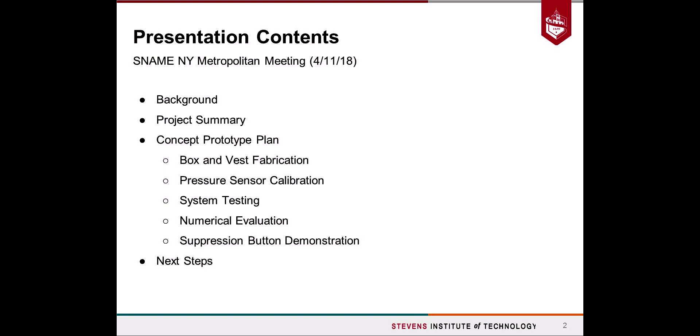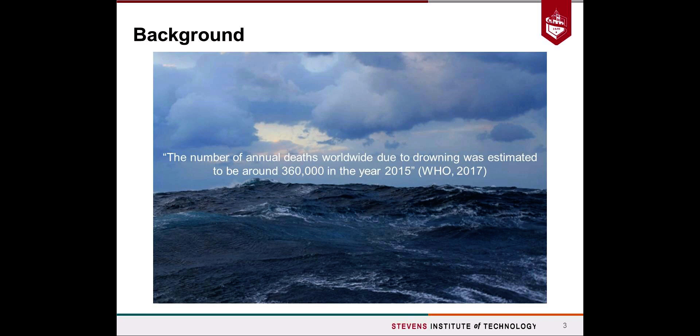So I have to apologize because we aren't actually trying to sell you this currently, but we're going to give you sort of a tasty version. So I'll start with a quote to introduce the problem. The number of annual deaths worldwide due to drowning was estimated to be around 360,000 in the year 2015. This is a quote from the World Health Organization. Of these deaths, nearly 50% are boating related.

So for boating accidents that resulted in the death of victims, 78% of the victims drowned, and 84% of those who died were not wearing life jackets. So let's talk about why people don't wear life jackets. The major quote, and what I hear as a sailor wearing a life jacket myself, is there's a lot of discomfort and inconvenience from wearing a life jacket, which is a terrible thing, especially when we're facing death as a consequence of potentially not wearing a life jacket.

So we look at today's life jackets. Are they the final answer? That's the question our team posed. We think not. There are a number of issues with the current designs, citing unwanted inflation, because the current automatic inflation type life jacket inflates with contact to water. It's a chemical pill that activates and allows inflation at that time. This can happen with a really heavy splash.

It can happen if you need to reach into the water and accidentally dip part of your body that has a sensor on it into the water. And you can become trapped under hulls if you're using small boats. If you've ever been canoeing, you can often get trapped under that, and the life jacket inflates and keeps you under there. And in order to self-rescue, people have to deflate or take their life jacket off to get out from under the hull, and then obviously that's not helping you, and actually hindering you.

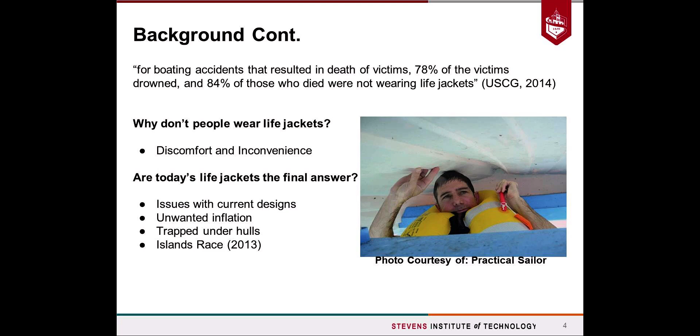And then there's this Islands Race incident in 2013. The Islands Race is a sailboat race off the coast of San Francisco. There was a crew, 5 people or 6. 5 entered the water in the incident. 4 cited their life jacket as rising up over their head, and the compartment shifted to one side, and somebody died in this incident. The body was found with this misplacement of the compartment. So we said, okay, maybe we should try and fix this, essentially.

And we looked at the current market options. There are many things. There's the inherent type, the inherent buoyancy, the big orange thing that you find on the old boats, and the newer types that are manual inflation and automatic inflation. We looked at these because they're essentially the most comfortable and least inconvenient to wear, as they're out of the way, as a sort of baseline product. This is an example of one here, the Mustang inflatable PFD.

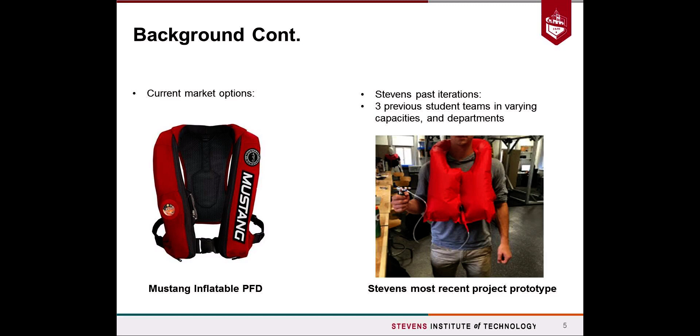So Stevens had tried this project out a few times. They'd done some iterations investigating different parts of the solution, and there were 3 previous student teams from different departments at our school. This is a picture of one of the vests that they created as a prototype. So we took this as a starting point and took their research and analyzed it for how we could do better and benefit from it.

Yeah, still me. We've done this a lot of times, so forgive me.

So our project goal is essentially our statement: use modern technology to design and test a new vision of a personal flotation device. Right, we're engineers, we have tech backgrounds, we want to use what we know to solve this problem.

The first major steps were a full literature review, both of the past Stevens work and of Coast Guard regulations, IMO regulations, the LSA life-saving appliance regulations on how the life jacket should be created. And then we came up with a system concept of what our life jacket would be. Like, if we could imagine a perfect life jacket, what would it be, and how are certain things being combated?

So the electrical part of our team developed the idea to implement a microcontroller and the corresponding circuit to read sensors, which we can elaborate further for you a little bit, but essentially we monitor the pressure of the water to tell the depth in the water column, and we monitor the user's orientation, something we're using in our testing preliminarily and potentially implementing in the final design.

The mechanical piece of our team developed a pneumatic system to handle the CO2 canisters and the CO2 passages for inflation of the compartments. Again, we can answer questions at the end, but we don't really further go into this because this wasn't our piece of the project.

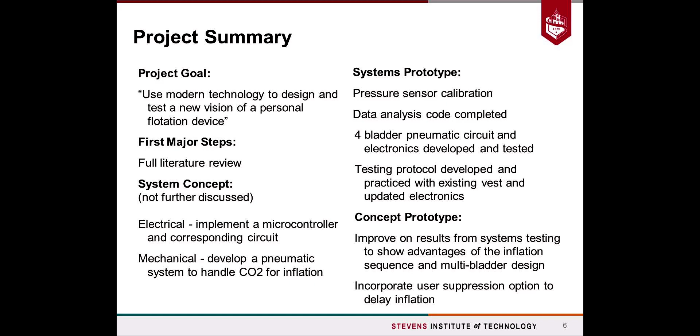And we want to be able to let the user say, look, I've jumped in the water to save my child. I don't want this to blow up in my face. I'd like to be able to swim down a little bit more. So we're trying to work on how that's going to be implemented, but details are still to be developed with that.

All right, so again, to go over a little bit of what we're going to talk about in the next few slides. First, we're going to talk about our concept vest and that prototype, including the box, which is waterproof to house the electronics, and then move on to our pressure sensor calibration. As I said, we've got a pressure sensor on board to measure depth for testing purposes,

and then talk about some of our additional physical testing, the tests that we've done with our previous vests with 2 compartments, 2 air bladders on board, and then talk about a little bit of our numerical evaluation, what we've done and what we hope to do with it, and then talk about our electrical circuit and show the suppression button switch. We've tested an electrical board, and we've also tested this switch functionality, and we'll show you a video of that a little bit down the line.

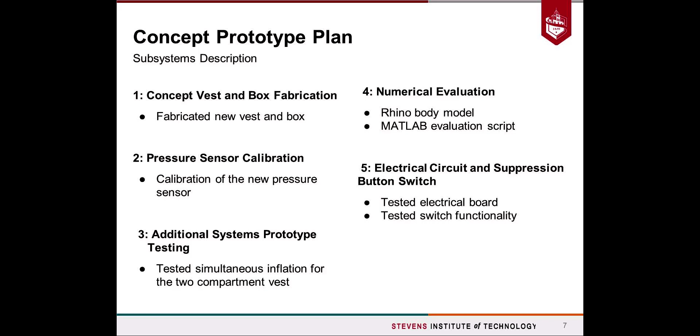So as far as the fabrication of the vest and the electronics box, what you see there on the left is our latest vest prototype. It's a 4-bladder design. The 1 bladder that you can't see is behind the neck to support the head in the floating state. Each of these bladders folds out. They're Velcroed down right now to give it a compact and more comfortable design. So they, when inflated, will reach their full size and right the user.

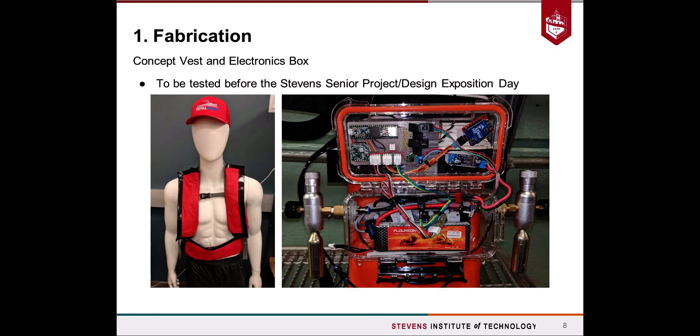And next to that, you can see our fully opened electronics box. It's a waterproof housing that allows for all the CO2 connections, this giant battery that we're using for testing, our valves, and then the different circuitry up in the top half of the box. This is our current state of the electronics box, and obviously we'd like to reduce that size quite a bit, but this is what's really necessary for testing over and over again. And then in a future design, we'd like to shrink this down and make the circuit and the batteries and everything like that more compact.

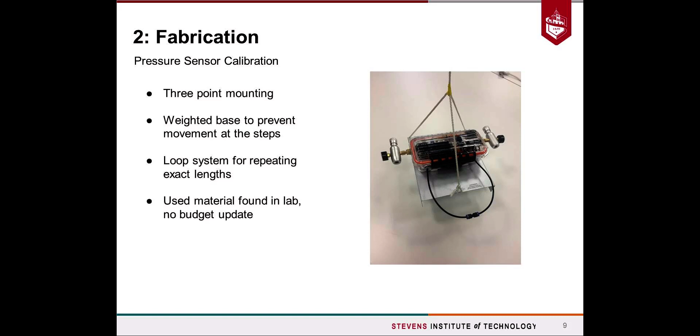It was lowered into the water to 4 different depths, brought back up, and then lowered again repeatedly to show that we were getting the same values no matter how many times it was lifted up and down. And then we were using material that we had in our lab to test this.

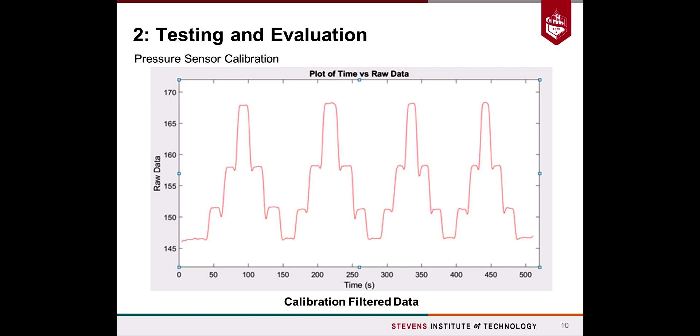So what you see here is our filtered data. So obviously as the depth increases, the voltage also increases. So you see it getting deeper into the tank, raised back up, deeper into the tank, so that we do have that repeatability. So each of those flat horizontal parts are where we were holding it to ensure that we were getting the same reading over a steady state.

From that calibration, we could fit the voltage against the depth so that we could ensure that we had a proper trend. We expected it to be linear, and it was.

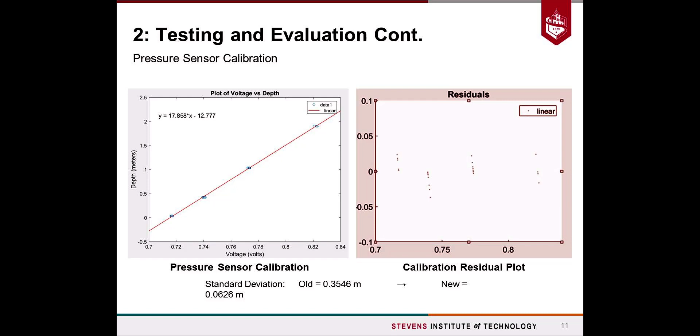So as compared to a previous pressure sensor which we were using, we had a standard deviation on that one of 0.35 meters, so quite a bit of variation, which led to some wonky data in our tests. And the new sensor we've got calibrated so that it's within 0.06 meters, so really a lot more accurate with our depth sensing.

Okay, maybe we don't have a video for you. It could be that this is the PDF and not the PowerPoint.

Regardless, so we did some initial testing on a previous vest configuration. This was a front compartment and a back compartment linked together but separated so that they could be inflated at varying times. And this awesome looking orange thing is our test mannequin. It's something repurposed for lifeguard training. It's weighted to the weight of a human when filled with water, density of a human.

So we used this and ballasted it so that it would sink to the bottom of our tank in a face-down orientation, and we could use the pressure sensor to initialize the vest inflation, and we could test the rotation of the body as it came to the surface and the time it took to rotate and come to the surface. So what we did here was some repeatability testing.

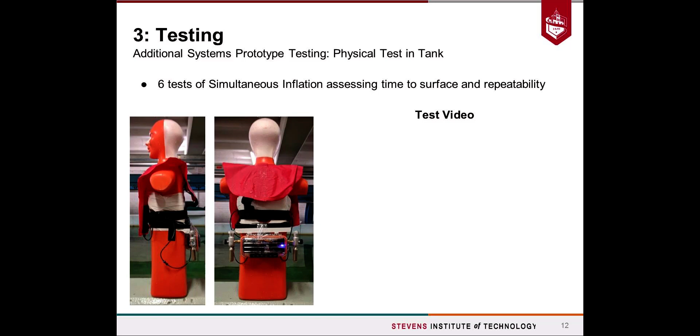We only tested simultaneous inflation. We have done some testing with a delta T introduced between the inflation of the 2 compartments. That data was somewhat inaccurate, so we're redoing this testing, but we have some of this data to present to you here. So what you can see is some data collected from our microcontroller and data collecting unit, and then post-processed.

I'm sorry about some of the text here. Again, I think it's a PDF instead of a PowerPoint.

But on the left, you have body depth and orientation versus time. So the black line in the left graph is the user depth. This is overlaid by an image of a rectangle which represents the body with the 3 axes coming out of it. So you can see the red is face forward off the body, the blue is upward, and the green is arbitrarily to the left of the body.

So this body rotates face down, red pointing down at the bottom of the tank. The black dotted line is the threshold for inflation depth. So it reaches that point, there's a delta T between it reaching that point and the inflation. The blue dotted vertical line is the instance of inflation or activation of the bladders, and they take a moment to react, and then you can see the body rising to the surface and resting at its steady state, which I would have loved to show you in a video. It's pretty cool.

On the right here we have inclination versus time. So the black line is what I'm referring to as inclination. This is the local x coordinate of the body versus the global z coordinate, so that we have something that relates to the LSA guidelines for the inclination of the user. They specify that the inclination needs to reach minus 20 degrees from the vertical, so the user has to be tilted back in a way such that their mouth is up and away from the water. That is represented by this black dotted line in the right graph.

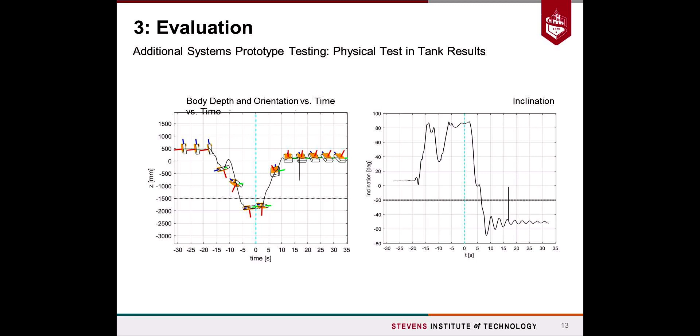So we tested the time from activation of the bladders to this proper inclination as a metric result, and we're going to look at some of the results here. We also overlaid the compiled pressure plots from the time of activation to the body reaching the surface of our comparison runs.

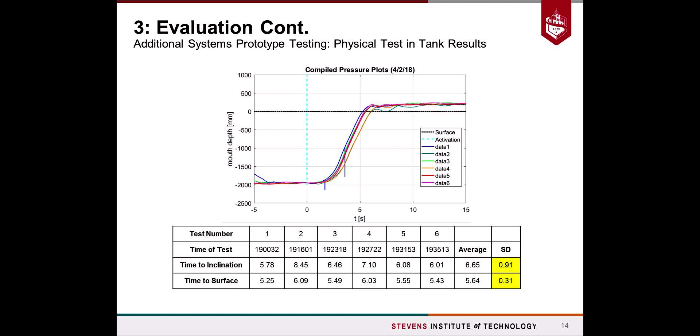These data are shown in the chart down below. So we collected a standard deviation to see how close and how repeatable the data was. For our time to inclination, the standard deviation was found to be 0.9 seconds, and the time to surface was found to be 0.3 seconds. We'll talk about what that meant for us.

And essentially, the conclusion we drew was that the time to surface is repeatable for our purposes in that we're trying to test delta T between compartments, and we were seeing in our initial delta T trials a significantly larger time difference than 0.3 seconds between time to surface for delta T versus a simultaneous run. So we accepted this standard deviation.

We had a larger standard deviation with time to inclination, and it showed variability. So we're looking at the metric that we're using. Minus 20 degrees, for instance, is supposed to be the steady state of the body, but that's not necessarily anything in our minds for what we're testing. We just need a metric for how quickly the body orients itself. So we may change this, and we're looking into that currently.

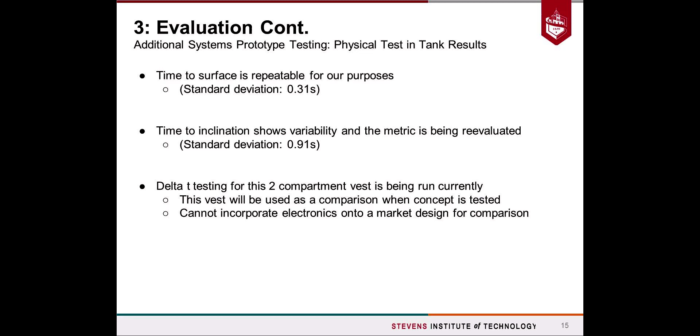Yeah, so delta T testing for this 2-compartment vest is being run currently. There are a lot of tests run at Stevens, so we get to fit in there with the other senior design groups. But the vest will hopefully be used as a comparison between this and our beta test. We can't actually incorporate our electronics onto a market design, though this would be ideal because then that geometry is what we could compare to. So we are looking into that, but it's harder and there are hurdles to get over with that.

Right, so as Julian just mentioned, what we really want to do is be able to compare our life vest to what's on the market right now and to other designs, previous designs and other historical designs. So we want to do that both physically, and then we want to confirm those results numerically. So the first way that we attempted to do this was using the Rhino modeling software with the Orca plugin for hydrostatics.

So what you see here is our three-dimensional man that we inherited from a previous design team, and onto him we've added a sort of old-fashioned inherently buoyant PFD, and then compared that to our smart PFD concept, and we did this so that we could try to run the hydrostatics in Orca to see how the body would right with the different layouts of the bladders or the inherently buoyant life vest type.

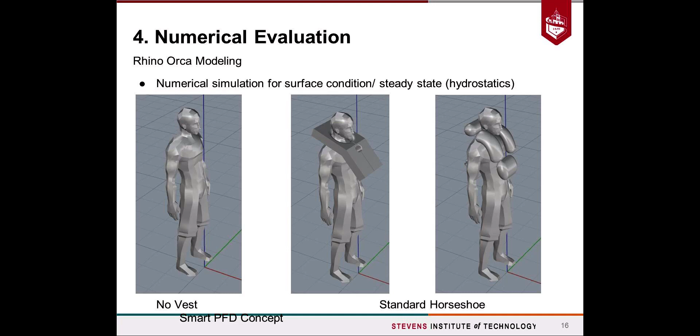We ran into a few issues with Rhino and the way that it modeled a human being that we tried to work out, but it would really rather have a ship than this guy. So we're working right now on a MATLAB script which will do essentially the same thing and calculate the righting forces and see how that body would react to wearing a different life vest design.

This suppression button idea will let the user delay that activation until prompted again. We're currently working with what that time delay should be, if it should be 10 seconds or 30 seconds, or a minute. But essentially, if there's no input from the user, the life vest will assume that the person is unconscious and right the body, activate inflation.

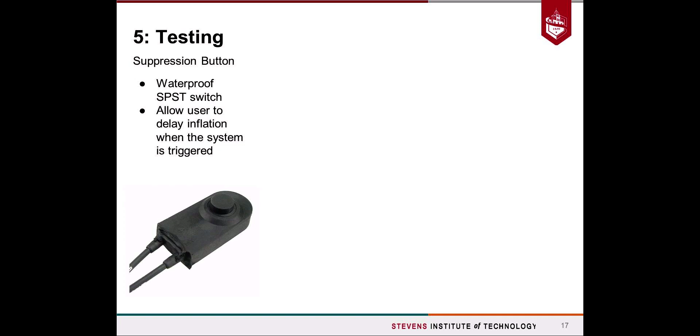So what we're working on next, we're trying to test our system prototype with different delta T staggered inflation sequences, and then move on to our concept prototype to get some comparison data between the 2-compartment and the 4-compartment vests. And then we're hoping to incorporate that suppression button onto our actual electronics box or onto the vest itself in such a way that it's more useful than just having a free hanging button.

And then we'd like to potentially perform a full functional test on a person. So far there's only 2 volunteers and you're looking at them.

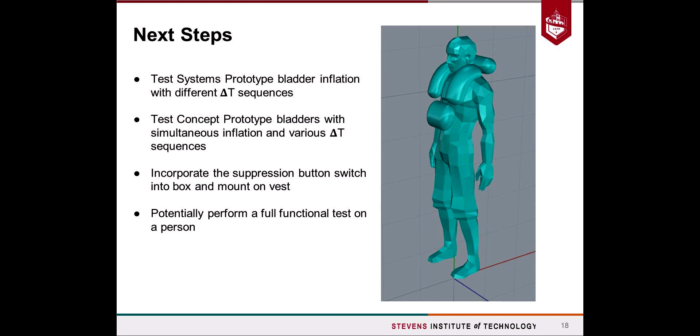Yes? You talked about integrating smart features into your inflation mechanism. You got your suppression button. I'm curious if you considered any incidents in recent years, specifically in 2011, the Wing Nuts incident and the Rambler incident, in terms of being underneath a capsized vessel, maybe being unconscious and having your life jacket go off and being stuck underneath it, even though you're unconscious.

Right, so there's a lot to work with. Right now, a lot of what we've done is getting this design to work, but then there's going to be a long step of deciding what sort of parameters will determine activation. Right now, as you saw from our testing diagrams, it would have been easier with the video. How we have it is that when the body's face down on the bottom of our testing tank, it activates and it comes back up.

But we sort of have to have a long discussion about what sort of parameters will initiate the automatic activation, and then what sort of parameters will come into account when it comes to this suppression button type of idea. So it's definitely something that we're considering because this problem is fairly complex, and there are always going to be exceptions to a person just unconscious in open water, as opposed to under a hull, or maybe their vest gets caught on something beneath a wave or something like that. It's definitely something that we're considering.